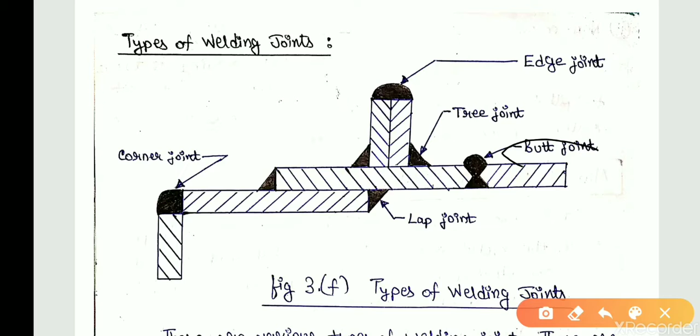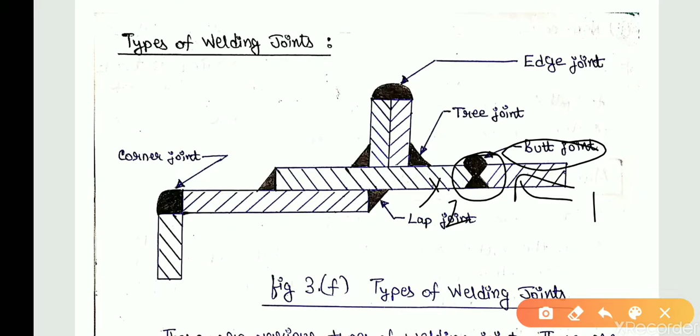Today we are going to discuss the types of welding joints as well as tungsten inert gas welding, or TIG welding. Okay, so let's see what are the various types of welding joints. The first one is butt joint. Let us consider that this is workpiece 1 and this is workpiece 2. I am placing workpiece 1 and workpiece 2 in this horizontal position and I am performing a welding joint in between. So this solidifies and joins workpiece 1 and workpiece 2 together, right?

Then comes lap joint. So what is lap joint? Let us consider this one is workpiece 1 and this one is workpiece 2. I am placing workpiece 1 and workpiece 2 in this position and I am performing a welding joint over here and here. This type of welding joints are known as lap joint.

The next one is corner joint. That means I am performing a joint on the edges of the workpiece, and the workpieces will be in a perpendicular position. Let us consider this one is workpiece 1 and workpiece 2, kept in this position, and I am adding filler material within this to perform a welding joint.

Now see the next one, that is edge joint. Edge joint means, consider this one as workpiece number 1 and this one as workpiece number 2. I have kept 1 and 2 in vertical position and I am performing a welding joint over here. This solidifies and joins the two workpieces.

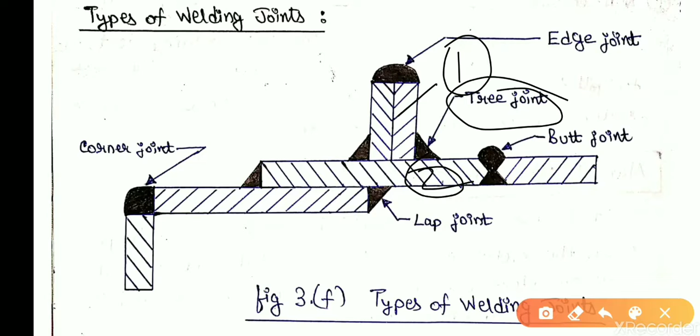And the last one is T joint. T joint, what is that? Consider this as 1 and this as 2. I am placing workpiece 1 upon workpiece 2 in a perpendicular position and I am performing a welding joint over here. So this is also a type of welding joint.

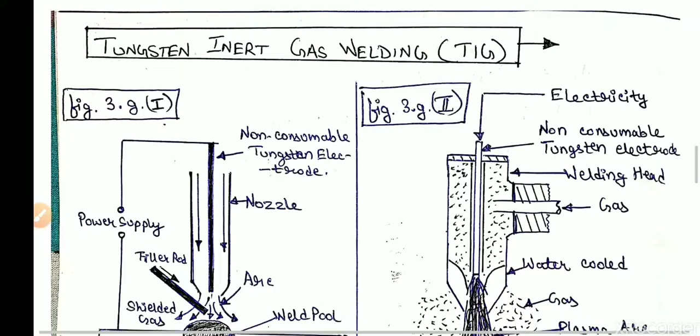Now let us move on to tungsten inert gas welding. There are two diagrams of tungsten inert gas welding. Both are the same, with a slight difference between them. Let us see the first diagram and the components used. This is workpiece 1 and this is workpiece 2, both kept in horizontal condition. There is an earthing connection and a power supply, one connection to the workpiece and the other to the non-consumable tungsten electrode.

In the previous class we discussed consumable and non-consumable electrodes. Consumable electrodes are those whose melting point is very low. That means it requires very little heat to melt itself and fill the holes to make a joint between the two workpieces. And non-consumable electrodes are those whose melting points are higher, right?

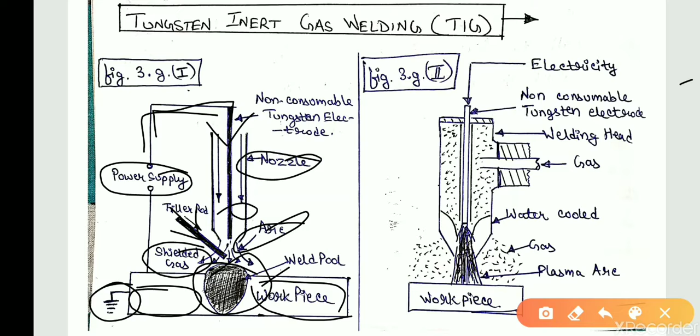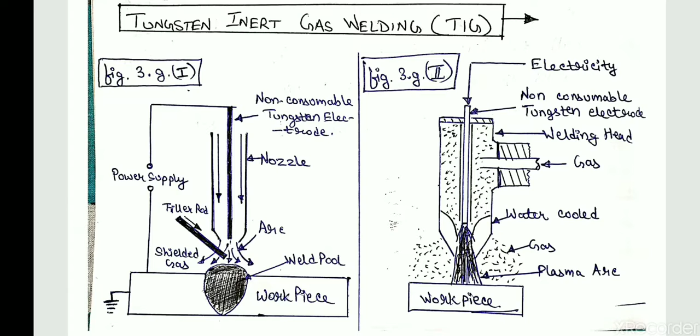The electricity passes through the non-consumable tungsten electrode, producing an arc here over the workpiece. This is the shielding gas. This is the plasma arc that has been generated, and this is also the shielding gas. This is called the welding head. Water is used to prevent excess heating of the nozzle tip, otherwise the whole unit will melt and the welding process will not carry out.

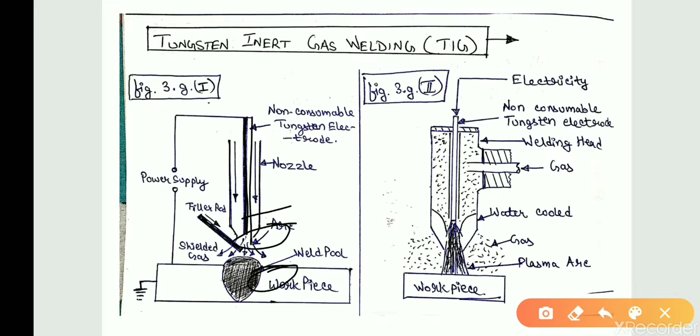It is a welding process in which heat is generated by an electric arc struck between the non-consumable tungsten electrode and the workpiece. That means the arc is produced between the workpiece and the non-consumable tungsten electrode.

Now, the weld pool is shielded by an inert gas. There is always a shielding gas around the weld pool. So what is inert gas? Inert gases are argon, helium, nitrogen. These protect the molten metal from atmospheric contamination. That means they do not allow the molten metal to react with the atmospheric air, so it stops the reaction.

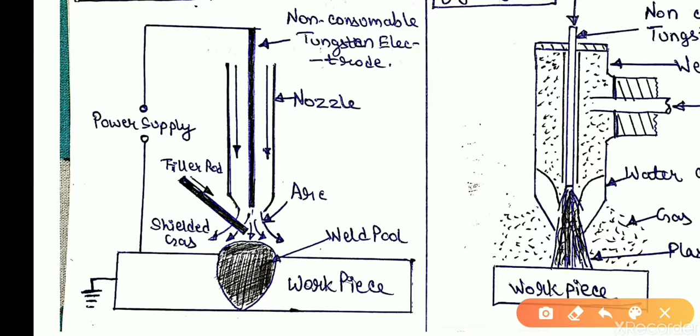Now, the heat produced by the arc melts the edges of the workpiece and hence joins them. Filler rod may be used, that means this rod may or may not be used according to the requirement of the welding. Tungsten inert gas welding produces a high quality weld of most metals. Flux is not used in this process.

Now let us discuss the applications of tungsten inert gas welding. It is used in the aerospace industry, manufacturing of space vehicles, and welding of small diameter or thin wall tubing, that means piping of various sizes. It is used in repairing tools and dies, widely used in joining thin sheet metal, and in manufacturing chemical plants or boilers. So this is the tungsten inert gas welding and its applications.